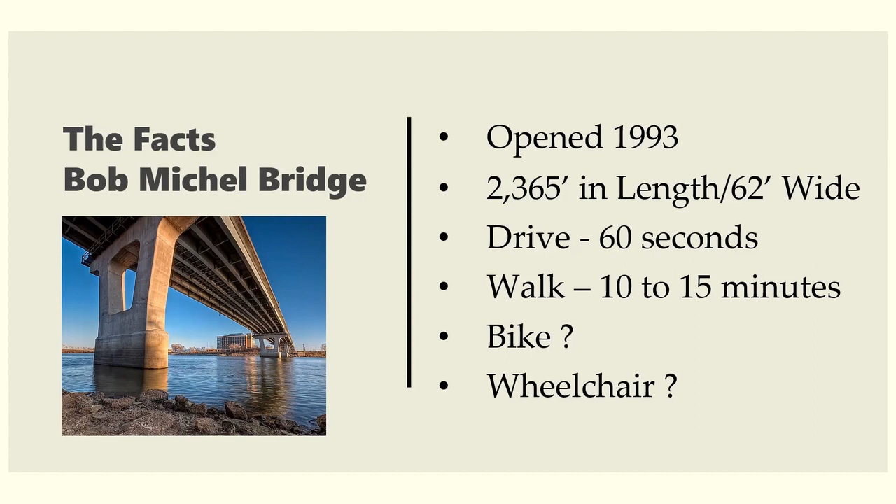It's about 2,400 feet long, 62 feet wide from parapet to parapet. I drove it in 60 seconds, staying pretty much at the limit, and you can walk it in 10 to 15 minutes if you're a hustler, or stroll it in 15 to 20. I've not ridden a bike across it, so I can't give you a time there, and I haven't talked to anybody who's been in a wheelchair or a scooter trying to cross it either.

The project, as it's starting, is basically the redecking of the bridge, and this work was kind of pushed forward with some of the other things that were going on, so they decided to wrap it all into one project - the redecking and the 14-foot pathway that is being constructed on it as well.

The original estimate - the number that I had given the people at IDOT originally, from engineering friends of mine who have a pretty good understanding of the scope of the work - was about $20 million, and it's ended up to be about $24.6 million with the actual bids. The money came out of the Rebuild Illinois program, as most of you are aware, that the legislature passed several years ago, and it's set to open and reopen in November of this year.

So that's kind of the rundown. The strategy talked about initially was weighing the difference between closing it completely and just leaving a pathway for walking and bikes, or having one lane of traffic plus the pathway. It was decided that the 12-month construction period, while causing inconvenience for all of us to drive around, gets the project done quicker. So that's kind of the backstory there.

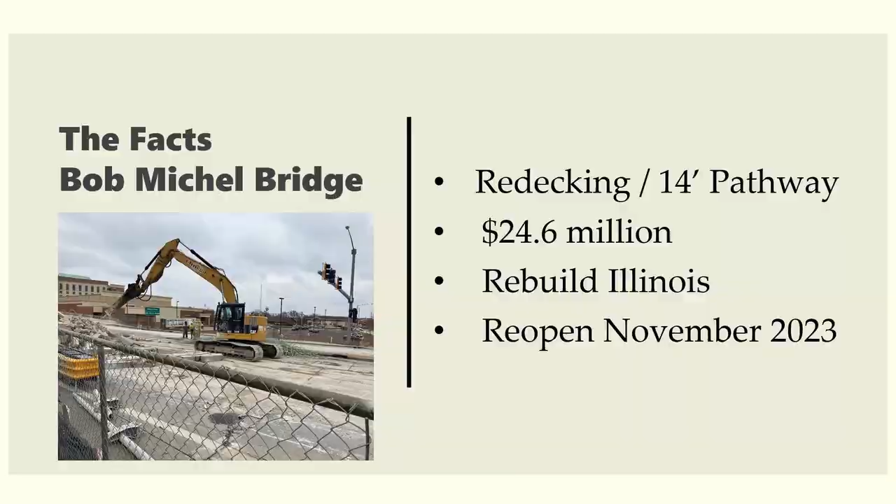The project location does include the intersections on both the East Peoria and the Peoria side. Some of you may be aware that there are going to be some changes downtown to Jefferson and Adams, and they're going to be restored to the two-way configuration that they were many years ago.

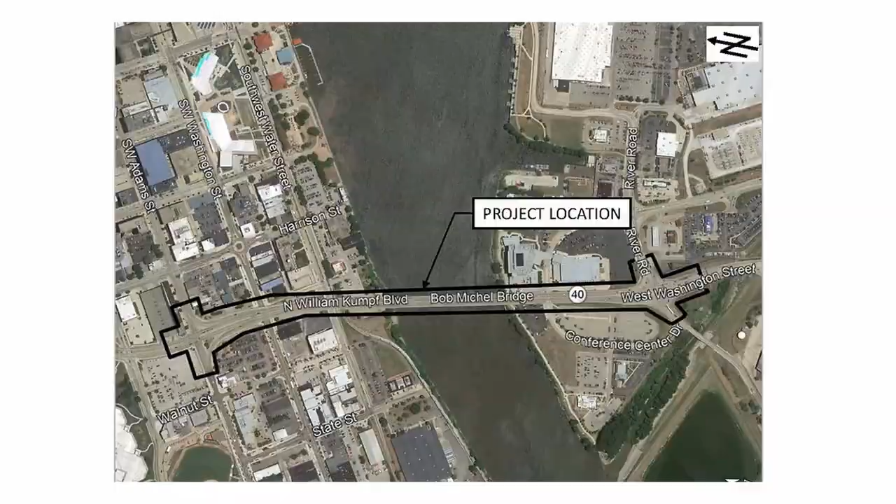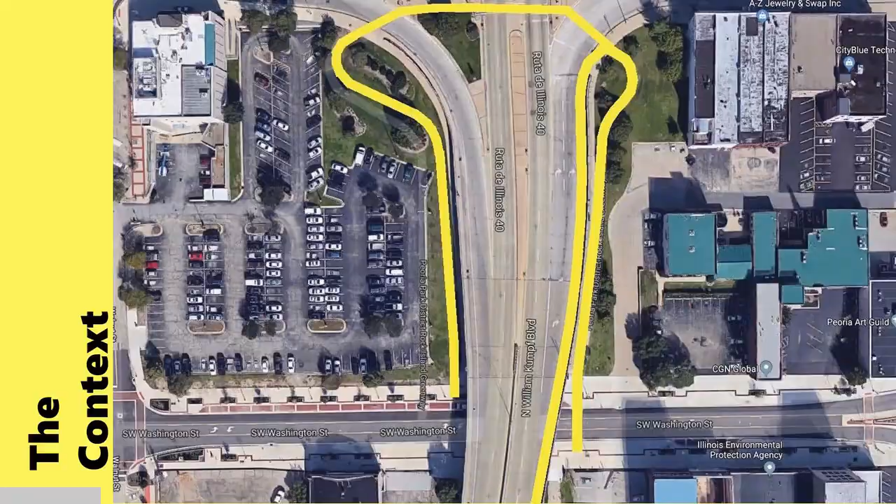So all of that is being taken into consideration on the Peoria side. The East Peoria side was a little less of a challenge to reconnect with what is going on their side. The connections from the pathway standpoint are outlined in yellow. It's not the greatest, but it does connect with the riverfront walkway between the Bob Michel and the McClugage, or the Murray Baker. You can see the East Peoria connection to that trail.

So the genesis really started in a conversation we were having with the Riverfront Master Planning Committee. Michael Freilinger, who many of you know with the Downtown Development Corporation, was on the committee with me, as were a number of other people. As we were talking about what we would want on the riverfront, he mentioned, and I agreed with him...

It has to be a kind of wow attraction, kind of the Peoria bean, if you will. Everybody knows the Chicago bean, right? You've been there and taken photographs. So it was just something people could experience, whether they're residents or visitors, and go away saying, wow, you should really see this. If you haven't seen it, you need to go to the Peoria Riverfront and see it, experience it.

My initial follow up, we had a workshop that we put together for pedestrian and bikes and some other planning with state officials and others down at the Gateway building. One of the things I had thrown out related to that was...

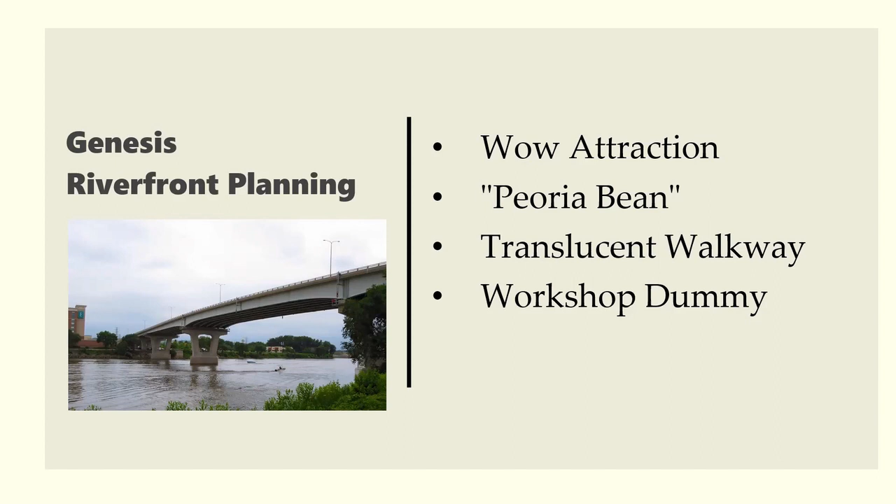And then the follow-up was, why don't you try and do something on the Bob Michel? It might be an easier lift. So that's that - I went from the workshop dummy to thinking about how we could address some of the needs in the Bob Michel and some of the experiences we've had, the empathy as you're driving across in a nice warm car, sheltered, and seeing people walking across, biking, or in this case in a scooter.

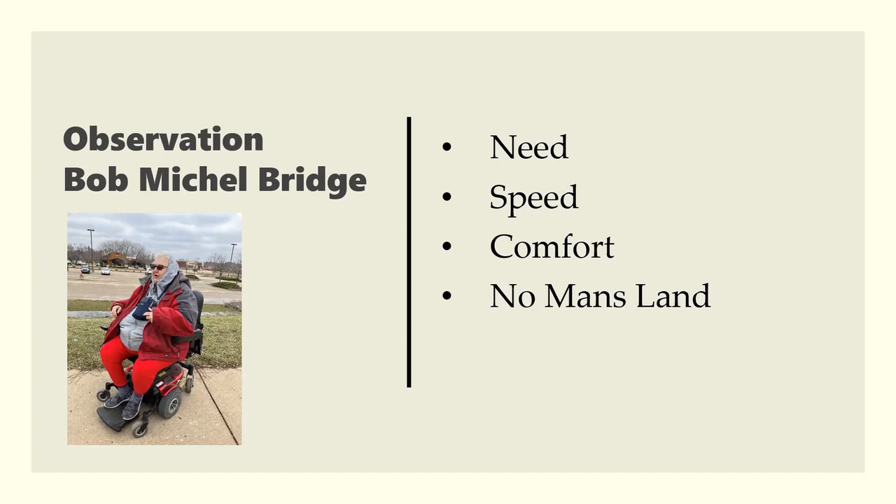So I'm going to talk about the need, the speed - the automobile speeds - then the comfort we enjoy in our vehicles, and the fact that the Bob Michel is in no man's land. It's not in East Peoria, it's not in Peoria. It's kind of, who's going to speak for that? And it was interesting going back into our...

Basically what we're looking at for those many years was an elevated sidewalk that was 5 feet wide, what IDOT termed an alternative sidewalk - basically a painted line, so it's not really a shoulder, it's just designated space there.

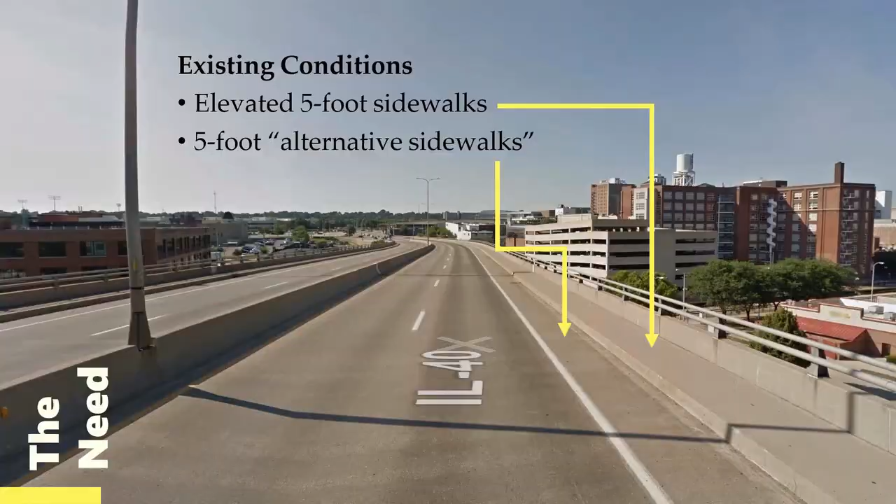It was just kind of like eating an elephant. We had to go through and prove the support for the bridge that the region would have, then document the plans, and then not take no for an answer.

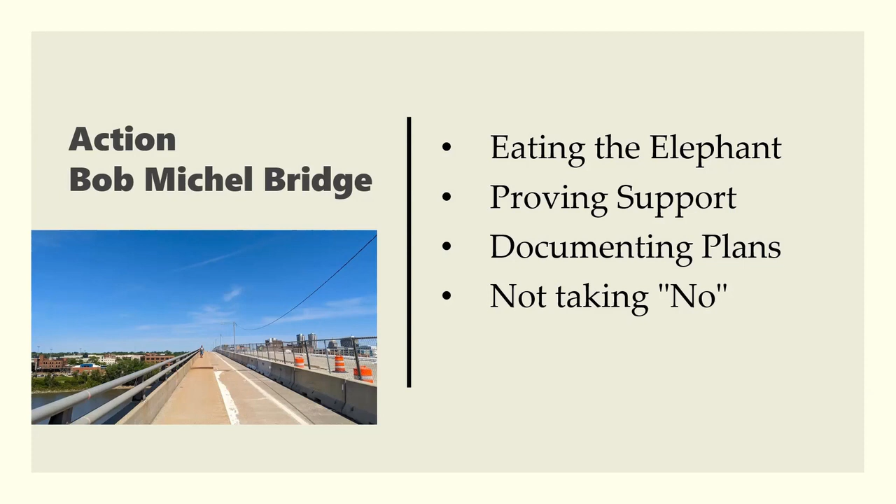A lot of this is just basic research that all of us have done when trying to promote a project - find the facts, find out what went on, and bring it all together in a consumable form that people cannot deny. So I did the research related to the plans surrounding the Bob Michel Bridge and other bridges. There are 6 plans, there have been 2 studies, and 3 state policies that were enacted because of those plans and studies. That's the evidence of what the need is from a transportation standpoint.

As far as automobiles, there's about 17,500 that cross it every day. As part of the planning and the study, they did do a pedestrian and bicycle count, but I couldn't find that data for you today.

The one thing I think is an interesting social commentary is that I asked our GIS person to look at the Illinois River and find out where the other barrier protected pathways are across the Bob Michel. There's one up in Marseilles, Illinois, and the other is down in St. Louis. So there's over 200 miles of river that you can't cross in anything other than a motorized vehicle. When I found that out, I thought, what a statement on how we handle transportation for people that can't afford a car or a bus or whatever.

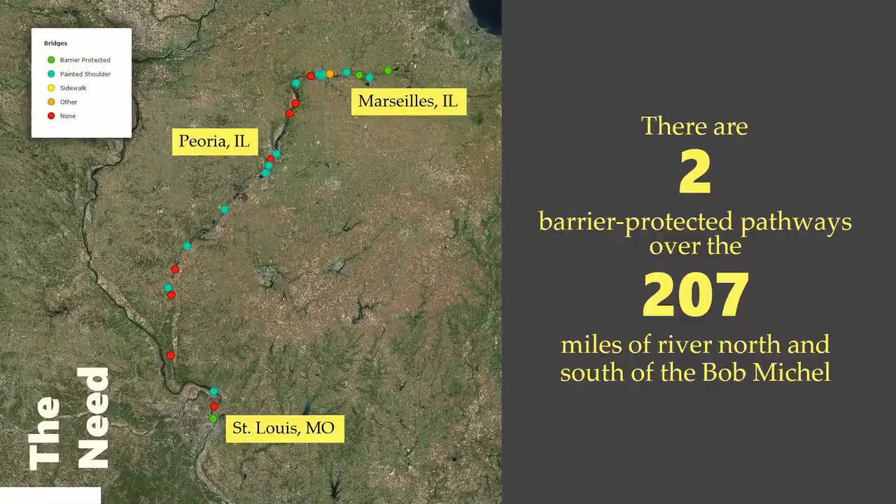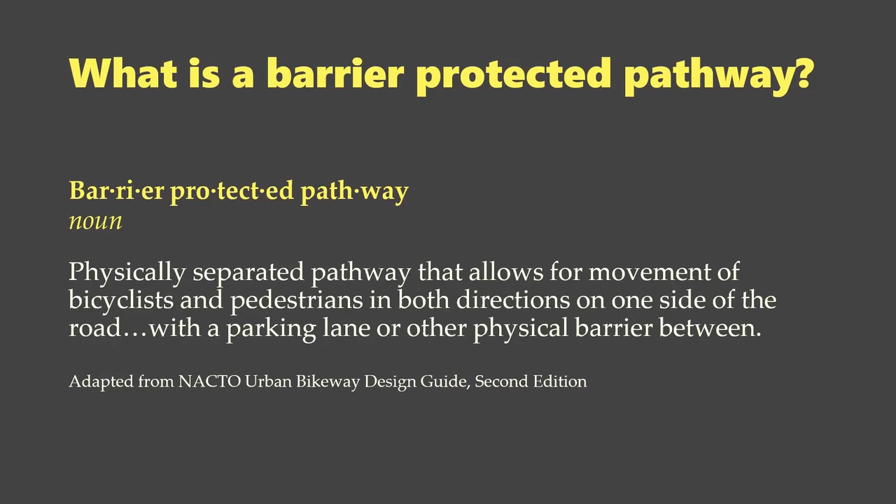So we'll just get into the barrier protected pathway and what is it. Basically it's a pathway that is wider than a sidewalk, and it actually has a concrete barrier between the pedestrian walkway and the actual automobile traffic. So that's pretty straightforward.

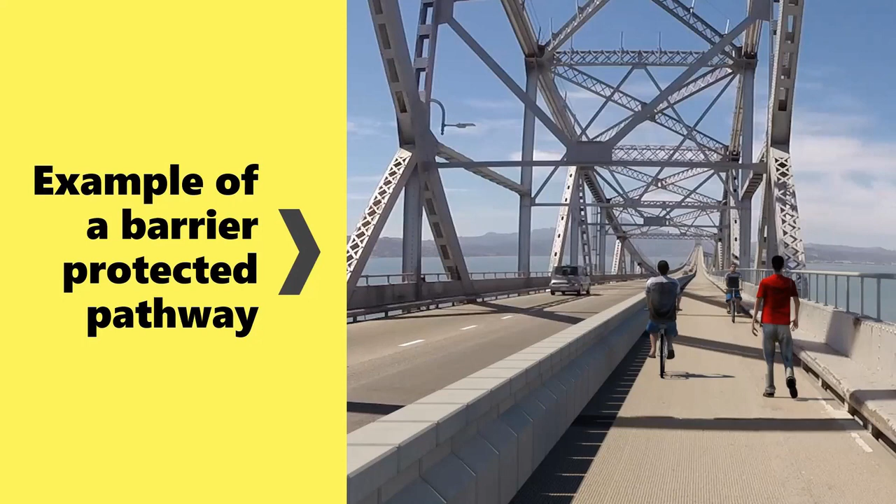And it kind of looks like this. This is another one where they've actually constructed this, and you can see it's a fairly significant barrier. There have been instances where cars and large trucks or whatever have hit those, but it's a fairly substantial barrier. I don't know how wide that pathway is, but obviously you can get bikes and people walking on it.

This is the sketch, and you can't really see it now because obviously it's not completed and they're still working on it.

And this is the eastbound McClugage Bridge. Now after whatever 10 years of advocacy on the part of pedestrians and bicyclists and others, and acknowledgement of the need for this kind of a crossing opportunity, it is now in IDOT's design standards. You cannot design a new bridge these days without a pathway. So that's why the McClugage is doing that. At the time the Bob Michel was designed, that did not exist.

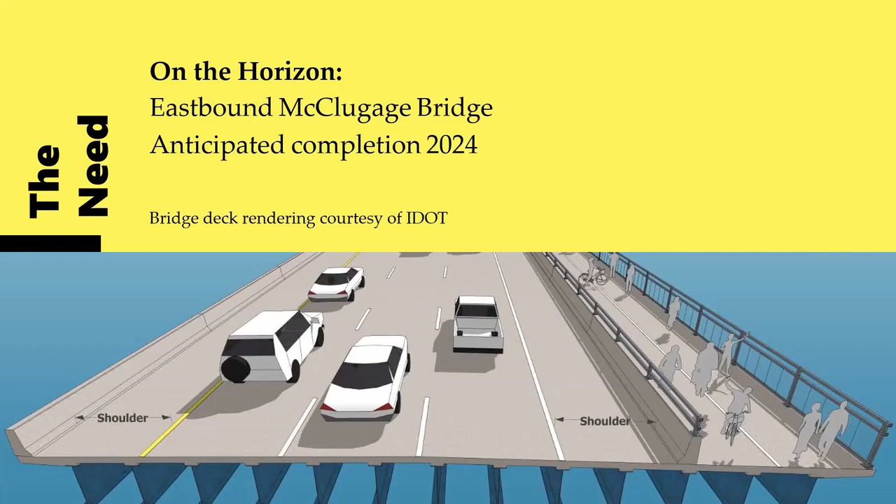So that's why we ended up with the sidewalk and the paint. This is a cross section of the bridge deck, and as it says on the top is the existing alignment, and then the potential alignment that you could get on that size of a bridge deck.

I have to give a shout out to a couple of engineering friends of mine, George Garib and Eric Thurgilson, both with Terra Engineering. Two guys at Terra, and I know them both, and they both worked for IDOT at one time, so I kind of bent their ear and said, hey guys, what do you think? After they got done laughing about it, they said, well, this is what you might be looking at. They had one of their structural engineers from their Chicago office actually take a look at the documents, and the firm that designed the Bob Michel Bridge is out of business, so there's no reference there.

So you had to go back. Interestingly enough, with all of our electronics these days, they had to dig out the paper plans and look at them. So that's kind of what they're looking at.

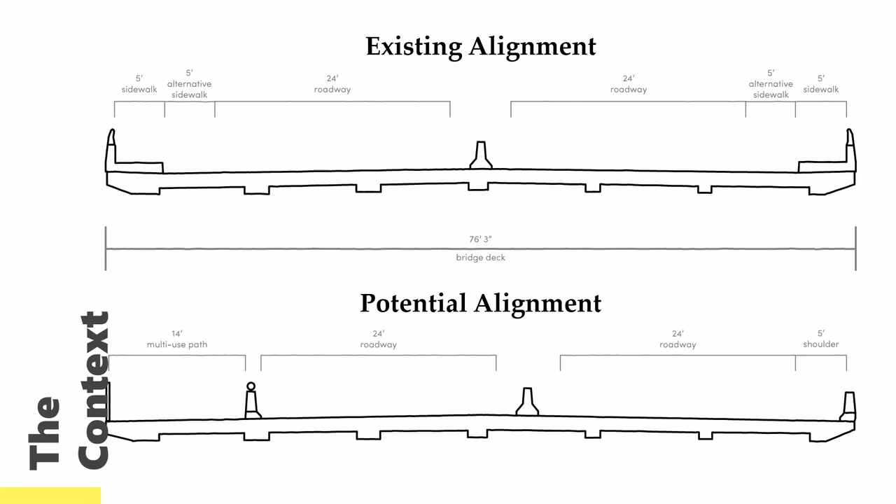So there's some, as you know, the bridge from driving it, you say guys, we've got the light poles on the center barrier, and the way those parapets are designed, the sidewalk and the parapet and part of the bridge deck are all the way they constructed it, designed it and constructed it. It's all kind of tied together.

They're taking, and I can't remember exactly what the measurements are, but they're taking like a foot here and a foot there, and so the space on, for instance, the center barrier is less than what it is now, and the shoulder, the painted shoulder, is not 5 feet, it's 3.5 feet. So there's the concrete barrier, a foot or so wide, and then 14 feet for the actual pathway.

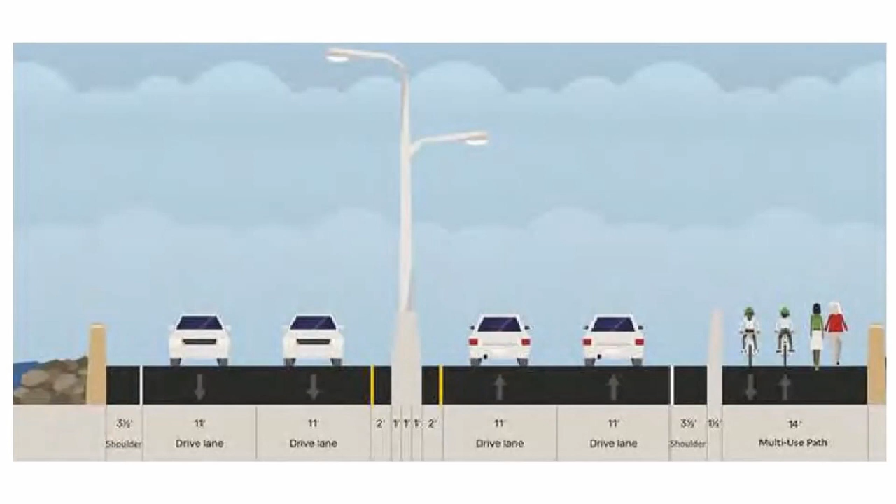And it's going to be, so we're not going to have two different levels. They're taking out the sidewalk, and everything is going to be on one level. There's not going to be a painted line down the middle for which direction you're going. It's kind of, let's be nice, and the bicyclists will run around the pedestrians, and hopefully everybody will be able to navigate it in a safe way.

This is, and I should ask, has anybody been across the temporary pathway?

It is interesting, and I had never walked across the bridge myself when it was in its earlier state. So in my research on this, I walked across it and found it's about 14 feet, though that varies a little since the guys weren't exact on the measurements when laying it out. But it's pretty close to 14 feet, and it's a very comfortable space when you get up there walking across it.

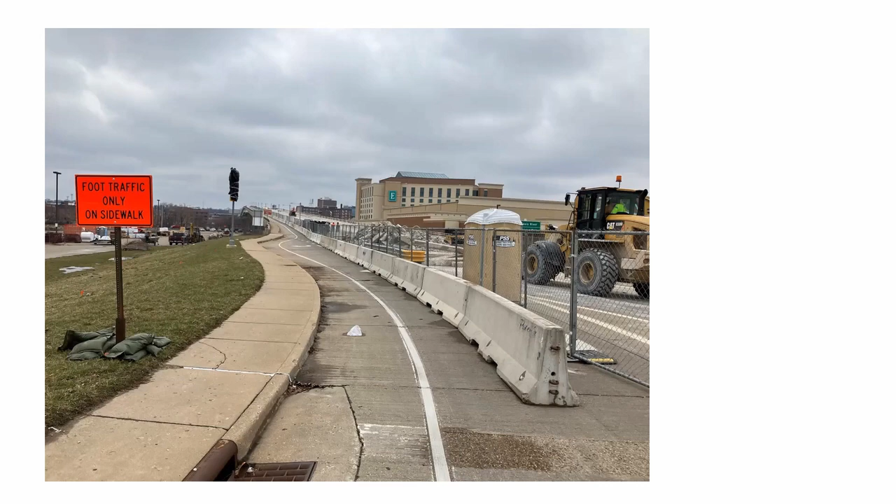So this is a shot down, obviously towards East Peoria. It was surprising because I picked a nice day to go out for a walk. Nothing against engineers, but guys, when you're doing something like this, you ought to talk to people who use it, right? Come on, how can you do something like this without doing that?

Well, that's what they do. And so, this is looking toward Peoria.

So now what they're doing is just going to be done relatively soon, and that's why I asked if you want to go see the before, you better get out there, because in mid-August they're going to shift it to the final side. I don't know whether they're going to put the concrete barrier up there, but you will be able to actually walk the pathway on the north side of the bridge, and it'll be on the same plane. That's what it's going to look like.

And then you can see they added some temporary lights on this, so you can walk it at night. And then these are some of the characters that are on there. I say characters, not in a derogatory way, it was just really fascinating to me when I was walking up and down there.

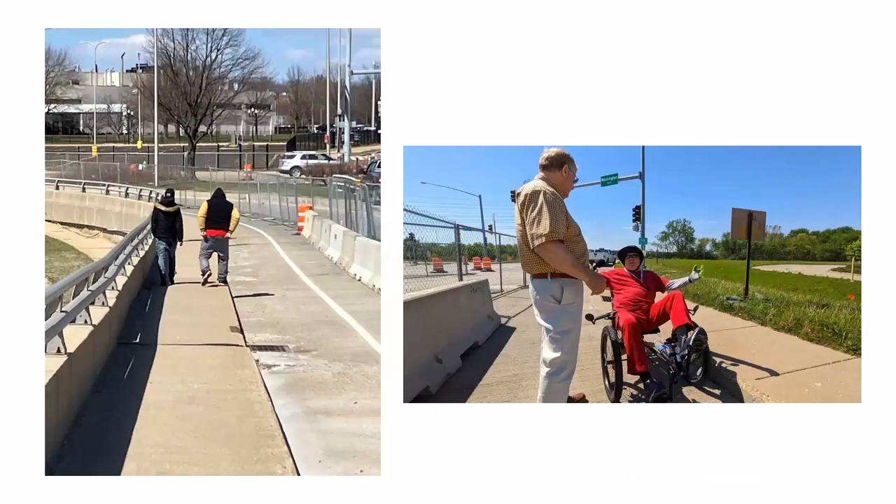Then those are a couple of guys — one of them just lost his car to repossession. The guy picking up his pants just lost his car, so they were saying, well, you've got to go over to Walmart and do some shopping.

This other guy here in the red outfit is a marketing professor at Bradley, and somebody from Bradley may recognize him. I've met him before, but he takes his, whatever this is, a 4-wheeler or tricycle, and he goes all the way to Morton on the trail, and he lives up in the West Bluff by Bradley.

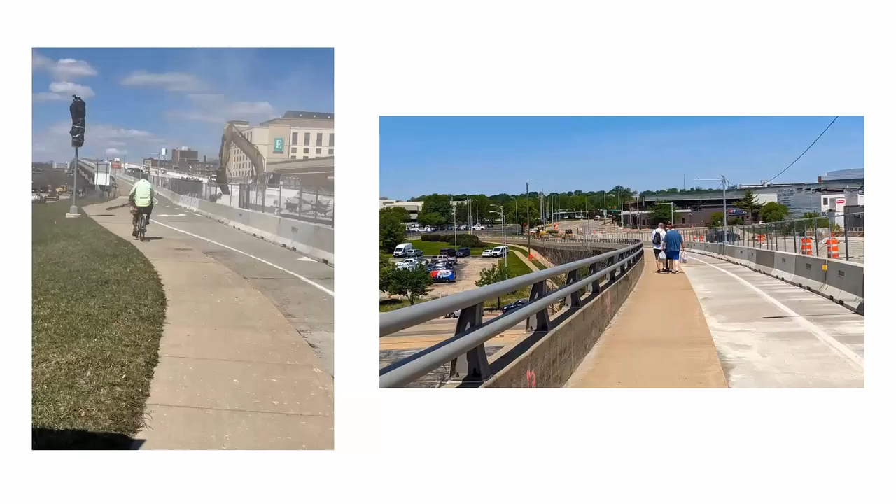So these are the guys — that guy didn't want to talk. And then these guys just walked by us and didn't want to talk to us either.

But most of the people were really — and then another guy that I didn't take a picture of, who stopped when I asked him, had just gotten out of prison and was riding his bike. He can't get a license, so he's riding his bike to a job in East Peoria. Again, all of them were very, very grateful that this is happening.

It took a lot of just kind of connecting with people. When I was first pursuing it, eating the elephant started out as a feasibility study, and I was trying to get with George and Eric, with Tara, to frame up a scope of work for a feasibility study to see if the engineering study, to see if this was even feasible.

And that was about a $50,000 lift. So, okay, we can try to find money within Tri-County. We have different funds we can access for different kinds of planning exercises.

At that time, there were people even in my own office saying, why waste your time? You're just not going to move this issue. And I thought, I'm old enough now, and I've been beaten up enough times — I say, okay, I don't care that you're saying this, it's still worth pursuing.